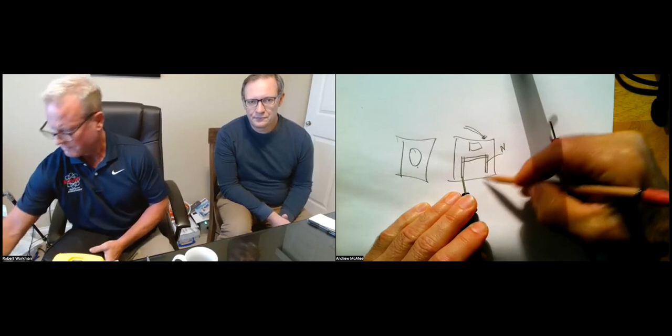Right, you're not testing the neutral and all the other kind of crap out here, like the neutral ground connection at the meter. And if you really want to, there's only 3 wires coming in: a hot, 2 hots, and a neutral, right? Right, so if you remove that neutral, you should be able to isolate your internal.

Correct. Now I'm just going to give a caveat - there's never 100% absolutes. You've also got a gas bond and probably a water bond coming in here, so it gets complicated. And there may be 5 amps of current coming in on this water bond, and you start testing things and your fluke or continuity tester may make a weird sound.

That's the current blowing up your meter. Right, I know exactly the sound you mean. So then I would probably go, okay, something is wrong here, and I still got a bunch of something creating a circuit through this. So you might want to go to that 4-gauge copper grounding conductor, that bond, and amp clamp over it.

And hopefully you're wearing some gloves at this point, and you remove that sucker from the equation, so you're not blowing up your meter for one. And for two, for a health reason, you don't want to be inadvertently touching stuff and create a path between you and your feet. I'm sure you're wearing electrical gloves, but there's a possibility your left and right hand could create a path right across your chest, and you're going to have some problems.

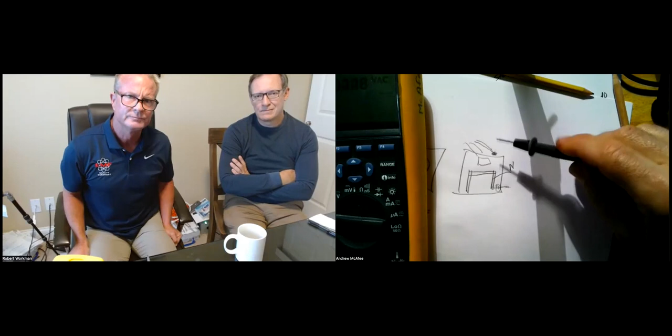Now, at this point, the voltage setting - some people go, well, what's the voltage? Frankly, I don't care, because this is such a convoluted conversation. You sometimes can have 0 volts between these 2 points.

Sure, because they are somehow bonded together and they're touching each other somewhere, so there's no difference between them. And that's all a voltage test is - what's the difference? And there's no difference, so it's 0 volts. And everybody goes, well that's safe because no current will flow. It's 0 volts. And the opposite is absolutely true.

Right, right, so I don't even do a voltage test anymore. Some people want a neutral to earth voltage test, an NEV. You got to take this red lead 100 feet away, because this neutral could be bonded anywhere and it's energizing the earth all around this location. So to actually get an accurate neutral voltage on this, you have to do what's called a remote ground reference.

So let's just punt on this conversation, because everybody's all about, well what's my neutral voltage? I don't care, I'm about current, because current is what kills. And there's always going to be 20 to 40 to 50 milliamps coming from the grid on that neutral into the home.

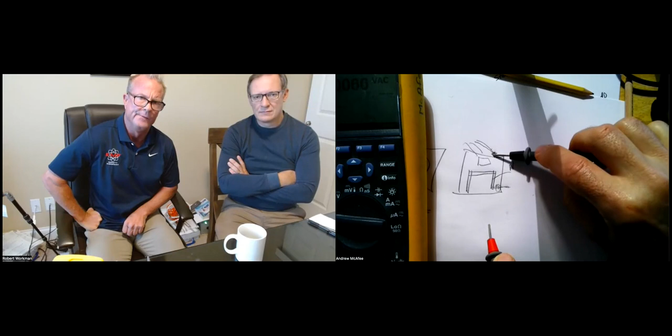All the time, because that's the primary return current from the transformer. So you're always going to have current. If this comes into any other earth reference point, that completes a circuit to earth, so there will be neutral current coming in. That's foreign current, so we're not going to deal with that. But I got to tell you, as soon as that neutral comes loose, it's a great opportunity to start testing all these other things. But let's just punt on those for now, if you don't mind.

Sure, so let's just talk about isolating this panel and getting these neutrals tested. So you put the black lead, just amp clamp it or whatever, just alligator clip, or just hold it firmly on there. Or if Rob's helping you out, just going real fast, you'll have your pliers on this thing and he comes along and just touches this real fast.

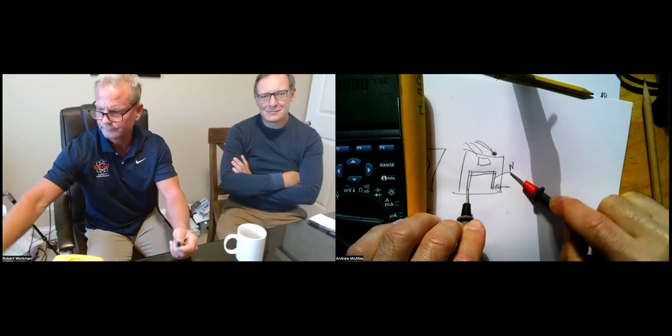But I also go like this - I go beep, just to make sure my meter hasn't clocked out. Good practice, right? I'll go beep, okay it's working, now touch this. If it's nothing, you move on. You put that sucker back on and you re-terminate it.

Don't let it stay out because you might miss something in the future. Sure. So you land it again. You pull the next neutral, touch it. Nothing. Put it back on. Next neutral. You just keep going. Now, let's say you find one. Beep. What the hell does that mean?

It means I got ground and neutral touching at some point on that circuit. And at least I've isolated. Well, it means I got ground and neutral touching at some point on any of those circuits still connected, like that neutral that I pulled apart has got continuity between a ground wire on any of the other circuits still connected to that bus bar. Yes, it does. And also it means what?

There's one other thing. It also means that, well, let me think here. It would mean it could also be touching any of the other neutrals. Very good. Ding, ding, ding. Yeah, 100%. So we have two things we have to explore here. Is it a neutral to neutral and or a neutral to ground? It can be both.

At this point, then you got to hunt down. You find where these wires enter in the panel, and you'll find the hot and the neutral. Right. Then you trace that breaker back to what breaker it is. And I usually put a little piece of red tape on there, and I go, oh, that's the dryer. I know right off the bat that it's probably the damn bond right in the back of the dryer. So it's probably a neutral ground connection.

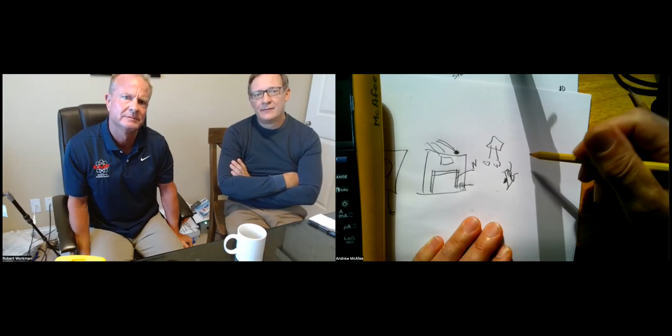Okay. Are you talking about a three-way in this case then? No. Well, I don't want to get too complicated, but just as long as you understand, the color of the wires are meaningless because a lot of people don't wrap them with black tape and all that. But yeah, you cannot switch the neutral. That's a big bad no-no. Oh yeah. And if you found that, obviously, you shoot the guy who did that. And that's our job, to show up and correct all these damn problems.

Yep. All right, so we got a neutral to neutral. We found a neutral and neutral, and it's a light switch in the living room. And I'm immediately thinking, okay, there's another neutral that comes into that 2 or 3 gang switch in there. We got this breaker coming in here. So let's call it circuit number 12 coming into a 3 gang switch plate. Okay, fine. I'm going to put that neutral back on the bus. And I'm still hunting, there's got to be another circuit coming in here.

So we pull the next one off. Nothing. Put it back on. Pull the next one off. Beep. All right. And I look at the breaker, find where it comes in. Kitchen lights. I pull the equipment grounding conductor off because in this panel everything's swimming together. I don't know if it's neutral, ground. Nothing. So I know it's not a neutral ground connection. But I touch it back to the bus bar. Beep. It's a neutral to some other neutral, right? Yeah, so I look at the circuit and I go, oh, it's circuit number 15.

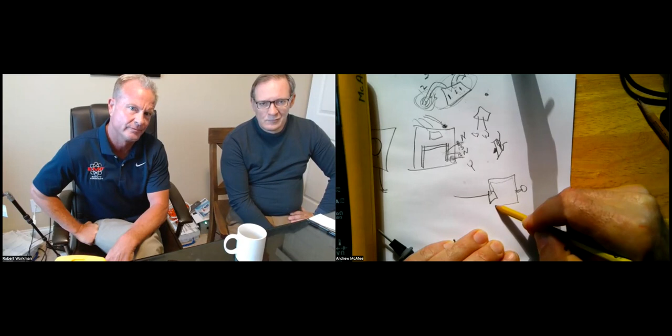And that's how, if you just want to walk through a house, in fact, you need to do this after you do your continuity test. This is a really important point. Some of these will not show up in this test. In fact, yesterday I proved this point. So what happens is you have a hot that comes out, comes into a bedroom. The wires will go around the room, hit a light, and it should go right back like this, right? Sometimes, if it has another pathway back to this one point, you've got a loop right here. Right. Current takes two pathways.

But unfortunately, the hot and the neutral back to the panel will test fine because there's no other circuit coming in here. So we're testing this neutral to another circuit, and it will not beep because there's only one neutral in this whole thing. But this neutral breaks into two segments. I call this a neutral loop inside of a room, and you will have a magnetic field in here, but it won't test out in the continuity test.

So if I'm not mistaken, knob and tube wiring does the same thing. Inherently by its nature. Yeah. It's got to go. Right. For any electrically sensitive person, I mean, for anybody really. Yeah, and the county inspector for St. Louis has said anytime you come across knob and tube, it's got to be remediated. And I still see it. People remediate it where they can see it, but then when it goes up into the wall or into the attic, nobody wants to get up there and deal with it. But yeah, I see the neutrals bouncing around and they don't follow the hot, and they'll make, like you said, just a big loop around the house.

Yep. So we want to have the hot and neutral run tight together in the same cable. In fact, this is now code violation. You have to have all the circuit conductors run in the same raceway. Right. And if you have magnetic field, that means these wires have become separate, and the distance is what's caused that magnetic field. And Rob can just be walking around, and if he's fine and all of a sudden he comes into a room where he turns something on, and in the middle of the room the magnetic field shoots up, we got a wiring problem.

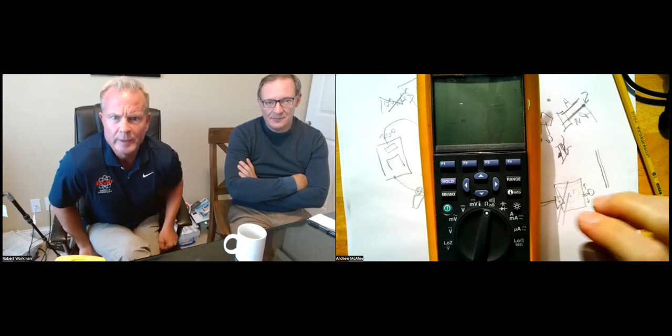So, Andrew, real quick, not to interrupt here. We have a client, and she's electrically sensitive, and she's got a really bad scenario where the drop and the meter is attached to her bedroom wall, and she's sleeping right next to it. And we had the plumbers going out today to put a dielectric union and PEX tubing in at the water pipe, so we really find out where we're at without having that come in. So that's going to be done today.

But my question would be, in a situation with an electrically sensitive person, do you almost have to do a meter disconnect combo to make things work, or would you think you have to get that panel off the wall and just move it someplace?

Well, that's a complete deal breaker. If you have a bedroom next to your, that's the problem. I don't care. She's got to move it. She's got to get her bed away from this because there's very little we can do to stop the magnetic field. We can reduce it a little bit by reconfiguring wiring and stuff. But unless you either move this or you move this, it's an untenable situation. And for electrically sensitive people, I say 10 feet.

Okay, so we're going to need to move that over because we can move it on that same wall. I know it's going to be expensive, but even if it's attached closer to her kitchen, that's a lot better than her bedroom because she sleeps there all night and she's really suffering. She's very desperate. She started crying when we were at her house last week because she says, I know I have an electrical problem. I can feel it.

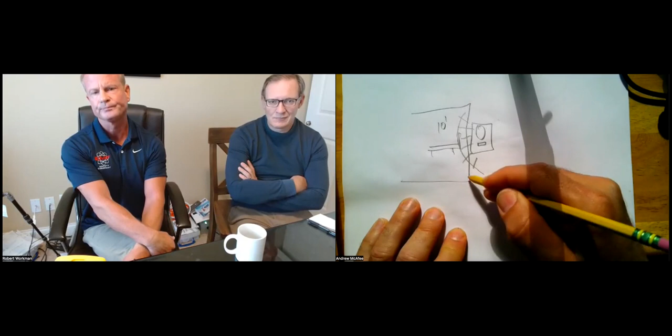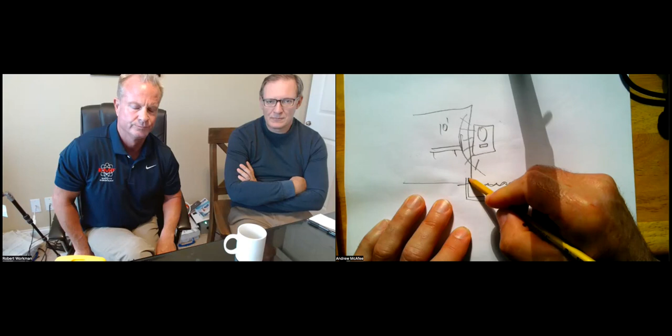So where the water pipe enters the home, here's our ground level. It comes through on the other side of the house. That's the back of the house where the bedroom's at, and the water pipe comes in through the front, but then runs back underneath their bed. Right. Everywhere the pipe runs, you're gonna have a magnetic field. So a real crash course in this, and good luck trying to figure out the water pipe solution in St. Louis.

So my strategy is we cannot have this acting as an electrode. It cannot be an electrode. We want those ground rods to act as the electrode, not the water pipe. So we're going to transfer the definition of the required electrode, 250.24 or whatever, to be your ground rods and not your water pipe.

So now if we cut this where it enters the home, it's really hard to do this where you can't even bond it. Good luck with that. But see if you can cut it before anybody can say, oh, that's a water pipe, you need to bond it. It's not an electrode anymore, but if it's just a freestanding piece of water pipe, you're required to bond it, right? So we're going to get to that.

So if you cut it here and install dielectric or PVC, PEX, whatever it is, then it goes metal again. Now this becomes a bond, not a grounding electrode. So this still goes back to your service. So now the neutral current is still hitting this pipe.

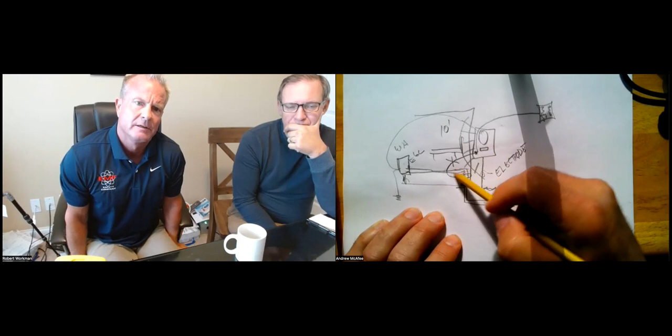Yeah. Okay. Even if you turn the power completely off here, that neutral is still tied to the primary side of the transformer. Oh, that's right, I forgot about that. And it's bonded through to the secondary side. So it's pushing in here. It's going to push on all pathways trying to move. And get this, the transformer also, because it has a jumper to the primary side too, is really connected to the whole world still. That's correct. And it's grounded. So this is a separate conversation, but we got to remove the primary source coming to your house. And what we can control is this point.

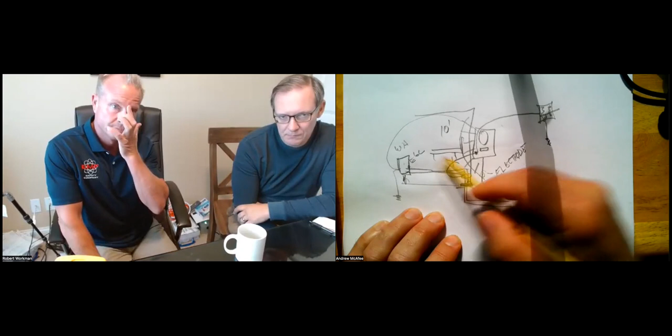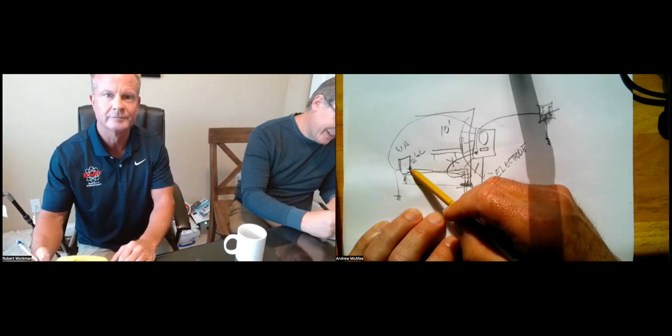I walk you through all these steps and I provide you the code, and hopefully with the inspector you can give him a 6-pack of beer or something and get him to not say this is not the way we do it in St. Louis. Well, would you allow it for this electrically sensitive person? It's allowed by the National Electrical Code. Would you allow an exception or a variance or whatever you want to call it? Most inspectors, in my experience, I know a lot of them, and as long as you're not trying to be an asshole about it, they're pretty reasonable people.

So in some cases, let's say we have a finished basement and we can't even get to where the water pipe comes in the house, and we can't bond to it. They'll let us add a second ground rod, I think it's 6 foot away from the first one, and they'll let us use that as the supplemental electrode. Now that doesn't solve the issue of having to bond the metal water pipe or the gas line or anything like that. But I have gotten away with 2 ground rods several times. So let's clarify the terminology. Mm-hmm.

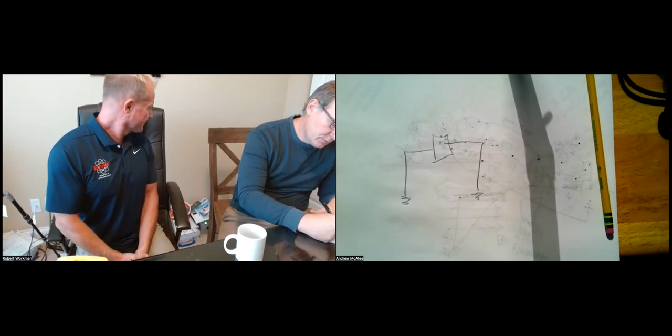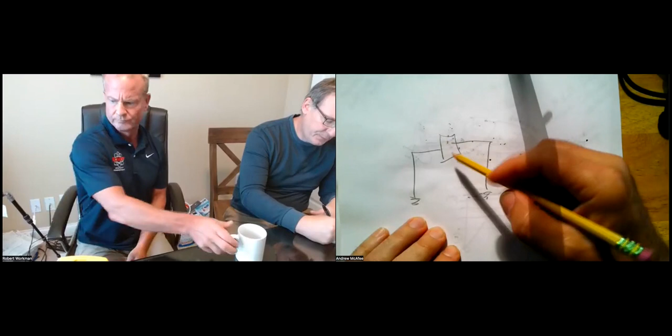That's 2 ground rods, but there's 1 grounding electrode conductor. That is not what I'm talking about. Okay, that's what I was referring to. That is fine. This is a problem.

That's an antenna, right? You have lightning arrestors, roof bonds, cable bonds. If you have 2, this is your earth plane. Well, actually, this is your earth plane. Whatever, sure. Current.

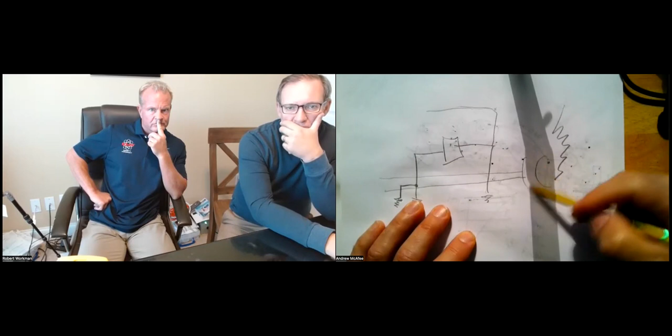Lightning strikes here, the wave is coming this way, hits up here, now it's moving this way. It's still traveling, and then there's a voltage difference between this point and this point at this point, and then current rushes through the home to this point.

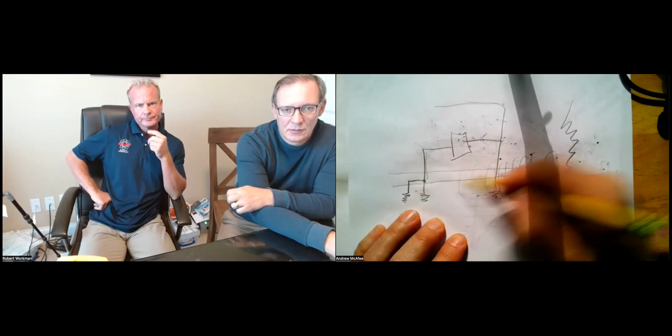We don't want this. We want everything bonded in one point. If we don't have this, this rushes in. This is basically one point coming in versus current swimming through the entire house to this other reference point.

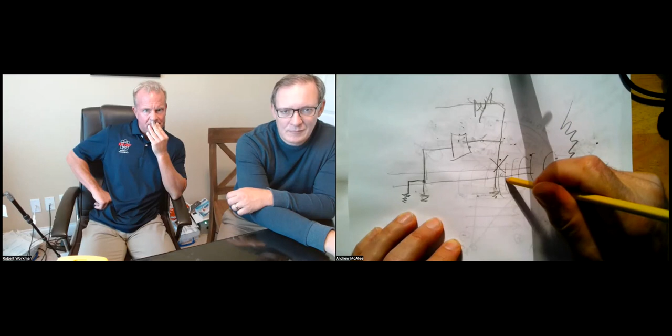So in general, we want to get rid of any auxiliary grounding. This includes generators, and now I'm reluctant to say this, but second buildings, outbuildings, you will have this phenomenon where you have these 2 ground rods that are way far away.

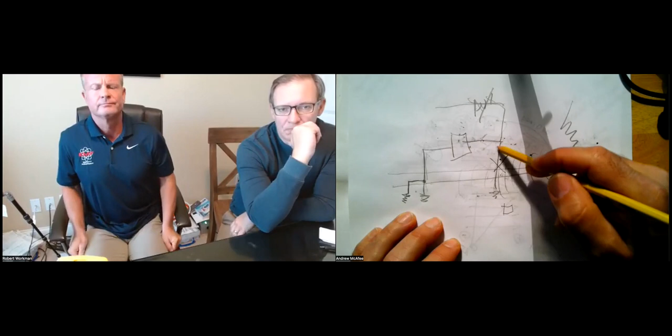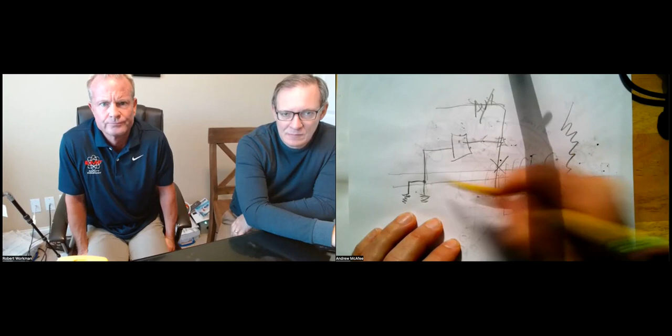As long as that second building is tied to the equipment grounding conductor, that's better than at least an inappropriate neutral connection. But we will still have current in the earth 24/7 because there's two earth reference points.

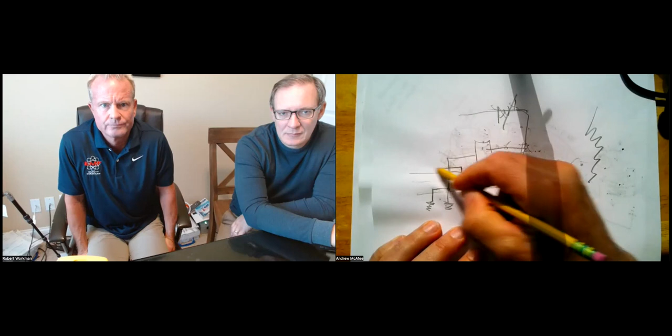So with the water pipe, clarify again. So if the code says, if you have this water pipe, if you didn't, explain it again what the auxiliary ground would be. Would it be this connecting to it, or just adding another ground rod here? It's just adding another ground rod, and the grounding electrode conductor has to be continuous.

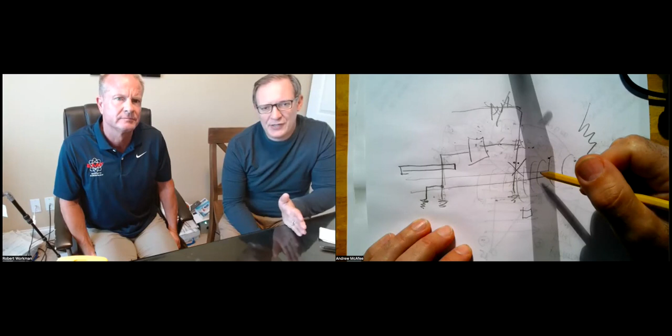It terminates in the meter base. It comes out the meter base and hits the first ground rod, and then goes on to the second ground rod. Yeah, that's not a problem.

I'm okay with that. In fact, pretty much I think the code says if you have more than 25 ohms of resistance on the first one, drive the second one and walk away. You don't even have to measure. As long as you have two ground rods, that's enough.

Now for the water pipe, I don't want the water pipe bonded to the electrical system, period. Because the EPRI information says, literally from their research, all of the blame for leukemia from the power lines can be placed upon the water pipe connecting with bathing areas. Wow. Because your skin has resistance when it's dry. When you are wet, it basically goes to zero.

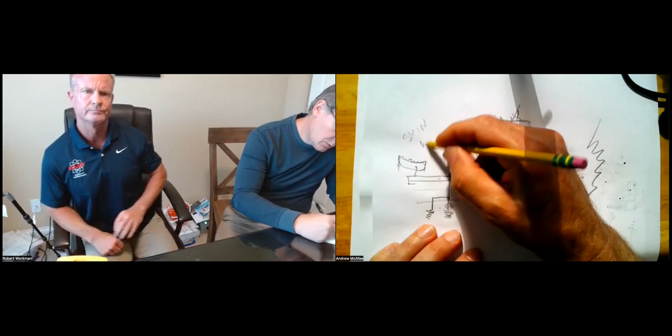So you're no longer blocking any ability to current. And so when you have your body, you have two layers of protection. Well, you have one layer of protection, that's your skin. And then you have internal.

Somewhere between 200 and 300 ohms across your body, inside your body, the fluids, tissues, and everything. Your skin can be a freaking mega ohm, it can be a heck of a lot, especially with electricians with tough hands.

It's considered 1,000 ohms for all measurements. If you take your fluke out and you want to test current, how much current is possible if a person touches a system and creates a path, you use 1,000 ohms as your number to measure the resistance of the skin and also the internal across here. So that means the skin is going to be somewhere between 500 and 700.

And if it's wet, it's zero. You're only left with the internal, 200 to 300 ohms. Gotcha. So that's IEEE numbers, 1,000 ohms.

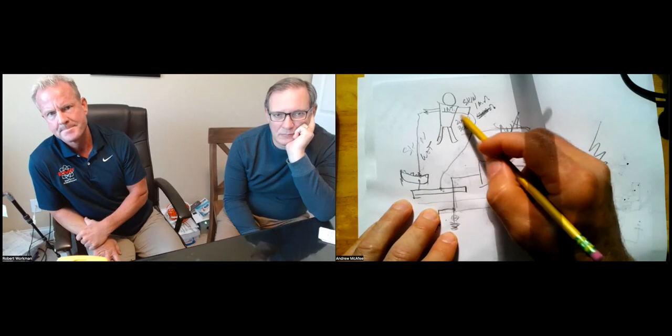So all the calculations I do, if you want to test your lead with the drain or the faucet with one hand, and then the other hand, how would that current flow through the person? However you want to set your meter up, red lead, black lead, to see how much current would go through the body. And you put that on your milliamp setting first.

You move the red lead over to this point, and test milliamp. And if you get nothing, great. There's 2 ohms of resistance on the milliamp setting provided by the meter. Okay, you turn it to microamp, it becomes 100 ohms of resistance.

Now, in my presentations, I go into the math on this, but basically here's the punchline: 2 microamps exceeds the NIEHS threshold that EPRI figured out would be a cancer-causing and leukemia-causing environment for children. 1 millivolt per meter was the number provided by the NIEHS.

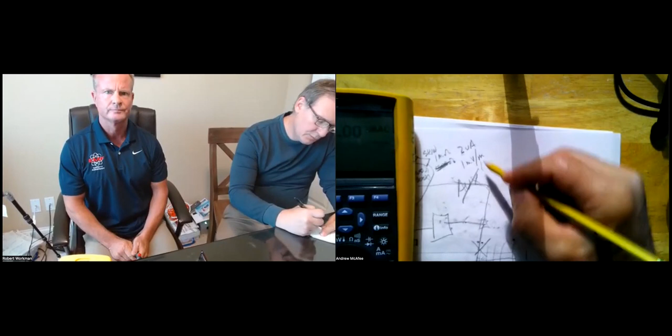If you have this voltage gradient internal in the body, 1 millivolt per meter, if that gradient is internal in the body, it messes up the bone marrow, it messes up the children's, all kinds of systems, and that would be leukemia and cancer causing.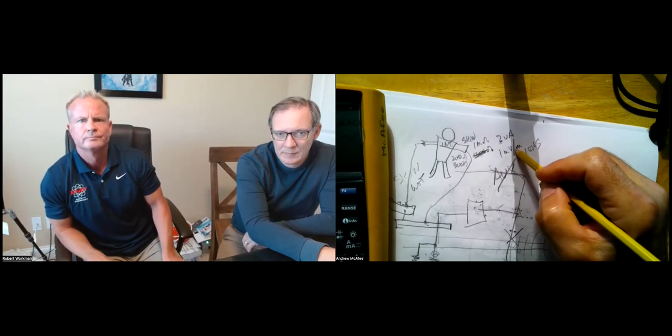So what's the translation between 1 millivolt into current? Because we have to actually measure the current, because the voltage is so misleading when it's so hard to get an accurate reading. Plus, internal in the body, how in the hell are you going to measure that? Well, EPRI figured out that 2 microamps.

I'll walk you through the math later if you want. If you have this meter set on your microamp setting, if you're getting 2 microamps, anything above that or 2 microamps would exceed this.

Now, if you're testing the body, that's using the meter. If you are testing the body, okay, you didn't have the body. You just stuck the meter in place of the person. You just have the meter leads here and meter lead. You're not touching the person at all.

If you involve the person, if you took the black lead here and the red lead here, and you plug the person into, and you're using 1,000 ohms of resistance of the body, then you have to move this decimal point. And we're now over between 0.08 microamps and even less, according to the math that EPRI had.

It comes ridiculously low. Wow. It's insanely low if you actually plug the person's resistance into this equation. So I just stay simple. I use the meter only.

I just plug the meter in here between these 2 points, and I look for 2 microamps. And if I got 2 microamps flowing through between here, then I know if I plug a person into here, I know I'm going to have a cancer, leukemia cancer. We're talking about ridiculously low numbers. And especially this is an insanely stupid number.

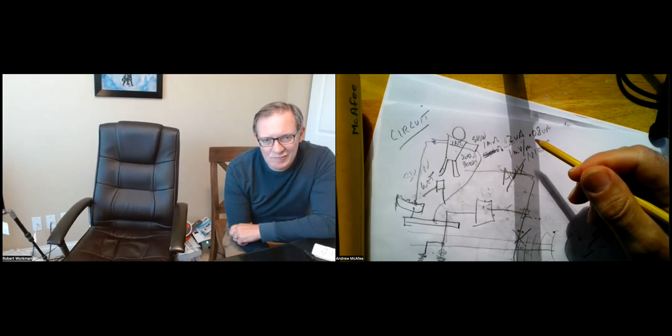Any amount of current, any measurable amount of current, because of the properties of how current flows between 2 contact points, and I go through this in my presentation. If you understand how, I know you understand how the capacitor works. You have 2 plates, and the energy jumping between these 2 plates is what we're talking about. You have 2 contact points.

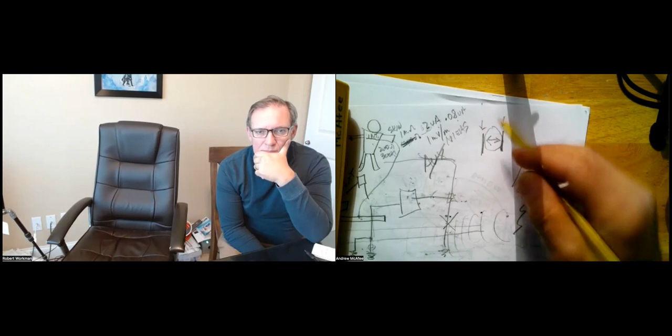So there's a medium inside this, and this is our body. That energy translates and connects through that resistance to this other plate, and we have a capacitive inductance, whatever, to these 2 points. There's the problem. But if you only have 1 plate, very, very little current will go through the whole body unless you have a secondary contact point.

So this is the problem with making 2 places of contact. The body is touching the drain or the faucet, and you connect and you make a circuit. There's our problem. If you don't have a circuit, if you cut out the second contact point by cutting the water pipe or whatever it is, you don't have a circuit, then you won't have that current flow. So just as long as you understand, we have to break the circuit.

And when your meter, when you said you're looking for 2 microamps, you're talking about between either a tub or a sink and the water pipe. Correct. Any 2 contact points that person will likely make. Now, I love to show people, okay, in your sink, the woman's working at the faucet here, and then...

She reaches over and touches either the oven, stove, or whatever it is. There's the body right there touching 2 points that are grounded. You got this going back to your panel, this going back to your panel. There's a circuit right through the body. There's 2 contact points. So I'll set the meter up to touch the sink and then the other thing, and only use the meter itself and look for 2 microamps.

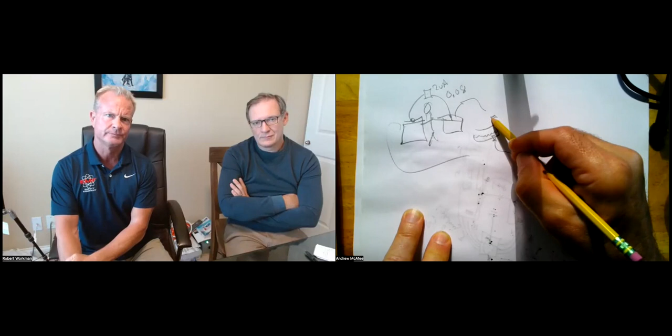So with a bathtub, you've got the drain down there, and you have a metal drain going to earth. So that's 1 contact point. You got your water in there. And what's the other likely person? You got a faucet. If that person is connected to the water pipe, there's definitely a circuit going to be here. The water pipe is bonded, earth, boom, you got a circuit.

So set up the scenario with your meter, how 2 people, a person would touch to an object. And the faucet to drain is always an easy one to hit. Yeah, I'm going to do that at my house today.

No, Andrew, so even though our piping here is plastic, PVC, does that still apply? If that circuit is broken, you will not have any current between them. Now, you'll get newer construction, yes. Construction, I mean, after like, correct, 1985 or 90 or whatever it is, they started going all PVC. Right, you didn't know that. Okay, all right.

All right, questions? No, this was fascinating. Thank you, this was super informative. This I got well, actually, I'm sorry.

I do have a question. You had mentioned a couple other things, I guess maybe they're books - EMF tracing 102 and NEC highlights, and then you said you had a book on water pipe. Can I find those on your website? I'm surprised I haven't seen them yet already.

It's quite all right, there's just too much information in this business. It's like drinking from a fire hose, and I kind of hit the ground running because I'm familiar with a lot of the terms, and I've been doing this for 25 years.